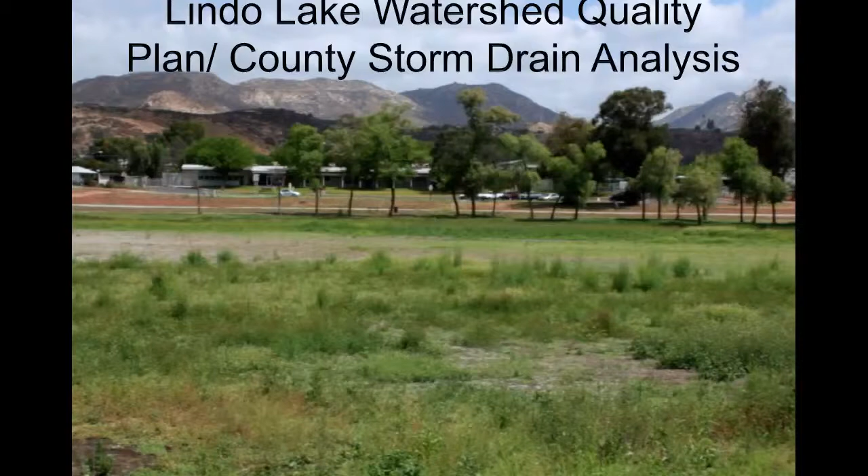The ENKI engineering team was tasked with creating a watershed quality plan and storm drain analysis tool for the County of San Diego. The location for the watershed quality plan is the Lindo Lake watershed, located in the eastern portion of San Diego County. Lindo Lake is burdened with poor runoff management from the surrounding neighborhoods that reside at higher elevations.

While the western section of the lake is fed with fresh water via pumps, the eastern section is provided water only from stormwater runoff and rainfall. Because of the nature of the water replenishment in this eastern section, and because it is the low point in the watershed, it has found itself a natural sediment basin for the area, accumulating years of soil and pollution.

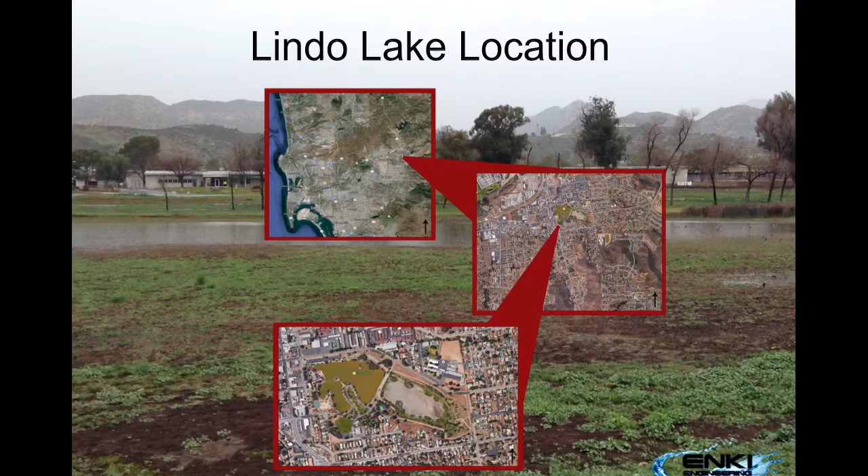The watershed quality plan tasked to ENKI Engineering will consist of a watershed management plan, which will include, but is not limited to, analyzing existing stormwater systems that feed the eastern section of Lindo Lake, providing recommendations to improve these existing systems, creating programs that assist residents who live within the watershed boundaries to reduce runoff from properties, and recommending future systems to treat the stormwater en route to the lake.

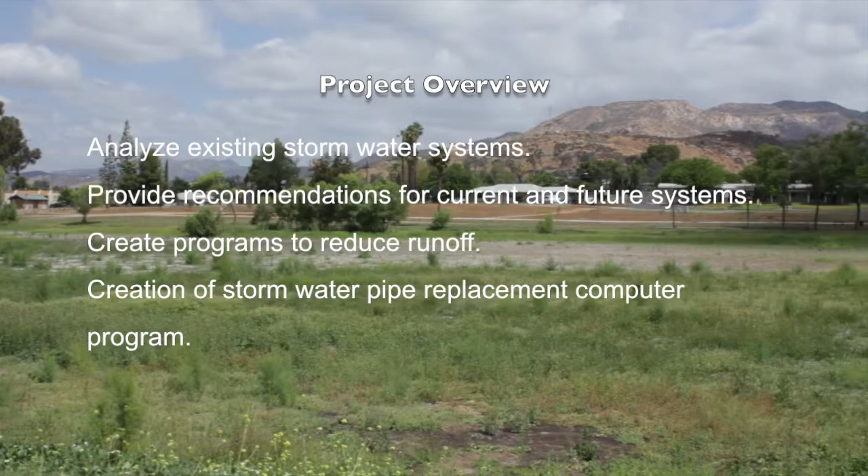ENKI also created a cutting-edge computer program to assist the county in future planning of stormwater pipe replacement. This program is designed to allow the county to stretch their budgets concerning necessary pipe repairs or replacements further than they are currently able. To show the feasibility of this program, ENKI will utilize it in a portion of the watershed management plan.

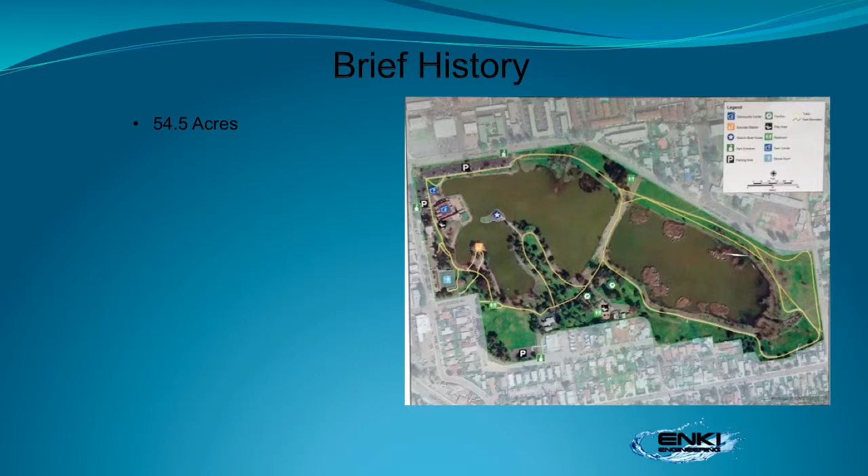Lindo Lake Park is a 54.5-acre public space with the eponymous lake at its center. The county acquired the park in 1920. Soon after, a dike was constructed through the lake, dividing it into two reservoirs. Due to percolation, evaporation, and the diversion of incoming water sources, both reservoirs could not be maintained.

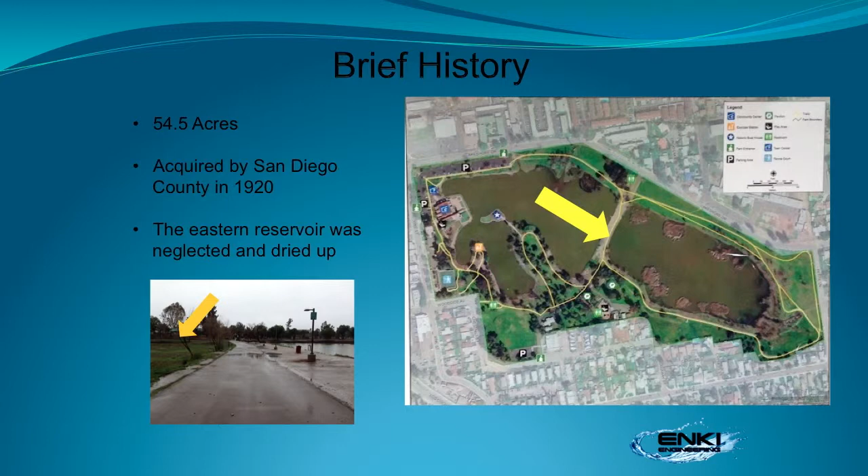Today, the western reservoir is periodically filled with purchased water. The eastern reservoir has dried up, only receiving waters from a stormwater outfall on the southeastern side that is amplified by heavy rainfall events.

The pollutants of concern at Lindo Lake include nutrients, sediments, organics, and metals. Water quality testing was performed for several of these contaminants. We collected water samples from both sides of the lake using a strict set of quality control guidelines.

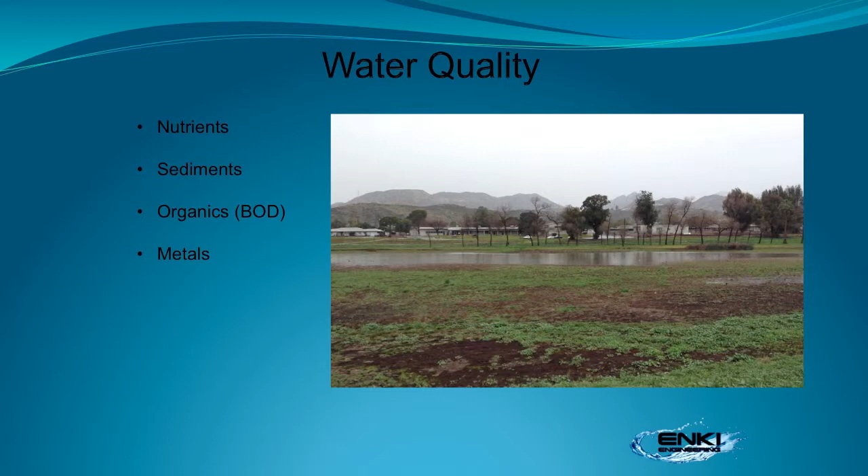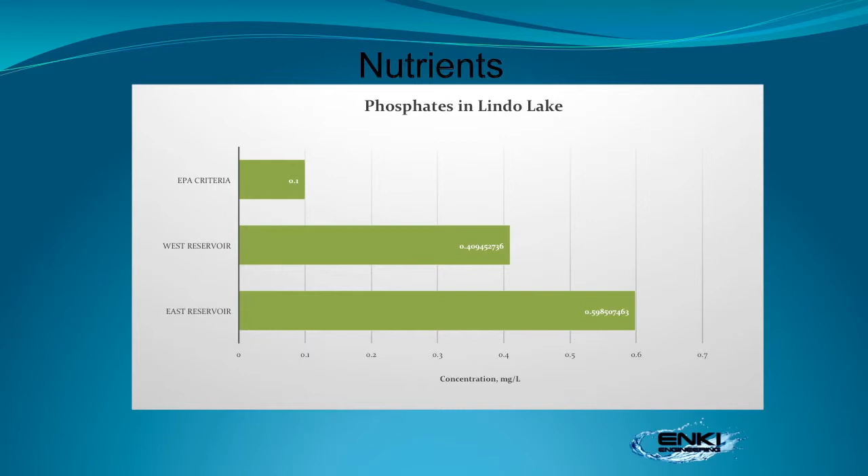We found that nitrates in both samples were well within the EPA criteria of 1 milligram per liter. The phosphates, on the other hand, were very high in both samples. These conditions could lead to eutrophication, which creates hypoxic waters that cannot sustain life.

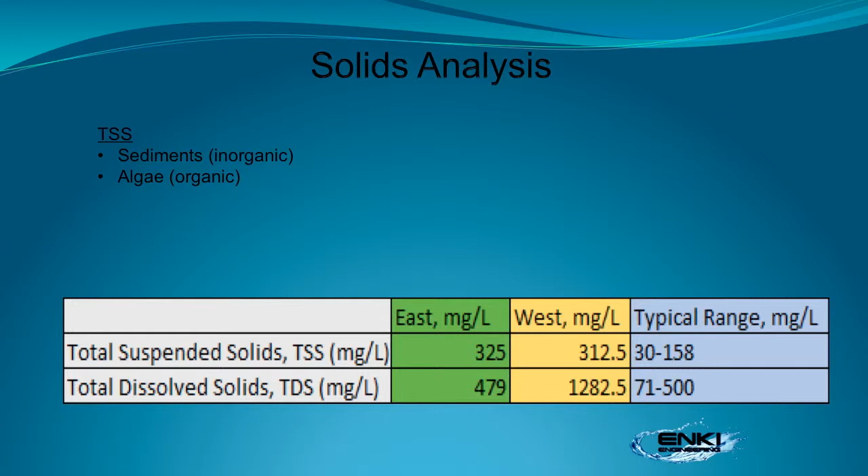The high suspended solids content mostly consists of sediment and algae from excess nutrients. It is worth noting that the western reservoir has more dissolved solids, which mostly consists of metal ions in surface waters. When this water percolates or evaporates, it leaves behind these contaminants.

Many plants and animals live in the soil. No endangered species reside in the park, but many are still in danger due to contaminants from the surrounding watershed.

ENKI Engineering is proposing to improve the water quality of stormwater runoff in Lindo Lake. As sediments continue to be sent into the lake from streams and bank erosion, the lake has become shallower. The geotechnical report will discuss the soil and sediment in Lindo Lake.

The topmost layer is vegetation. The topsoil is described as mud, very loose, saturated, dark gray to black in color. There is little detectable organic odor, but another component of this mud may be waterfowl droppings. The thickness of this layer is between 1.5 and 3 feet.

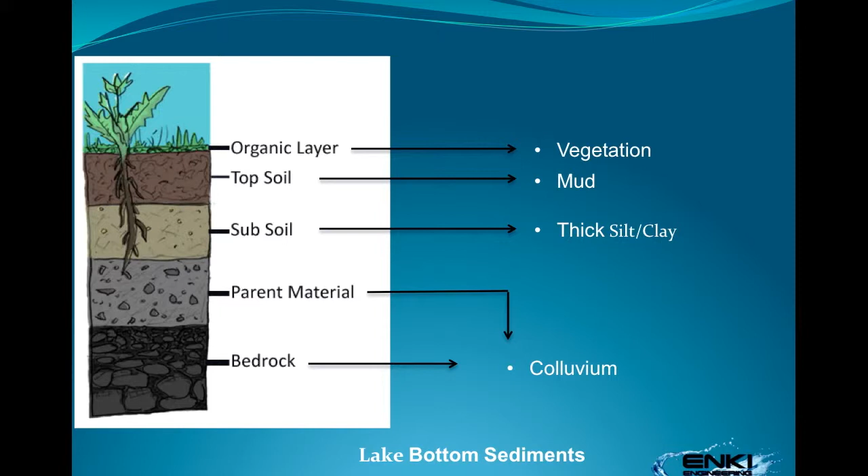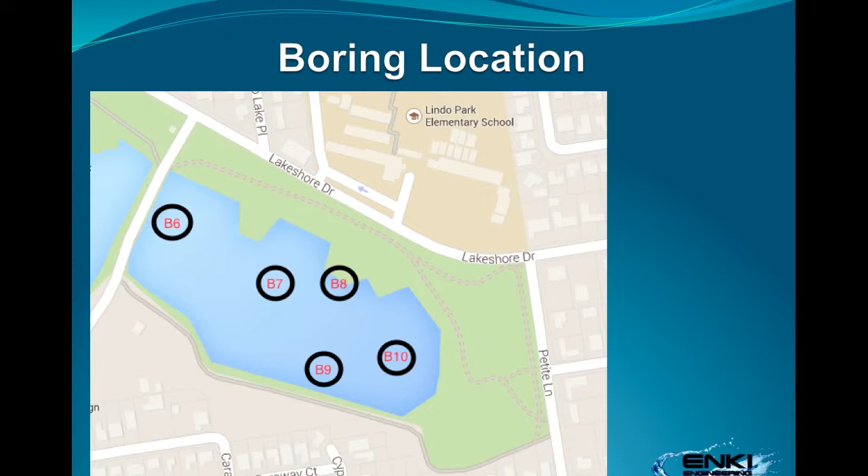The subsoil is thick silt or silt-clay sediments, of variable thickness and with some variability of texture. This layer can be generally characterized as soft, saturated, colored varying shades of gray. Underlying the lake sediments are colluvium soils from weathering of granitic materials and deposited by gravity into valley areas from surrounding hillsides. These are the boring locations where the soil was excavated from: B6, B7, B8, B9, and B10.

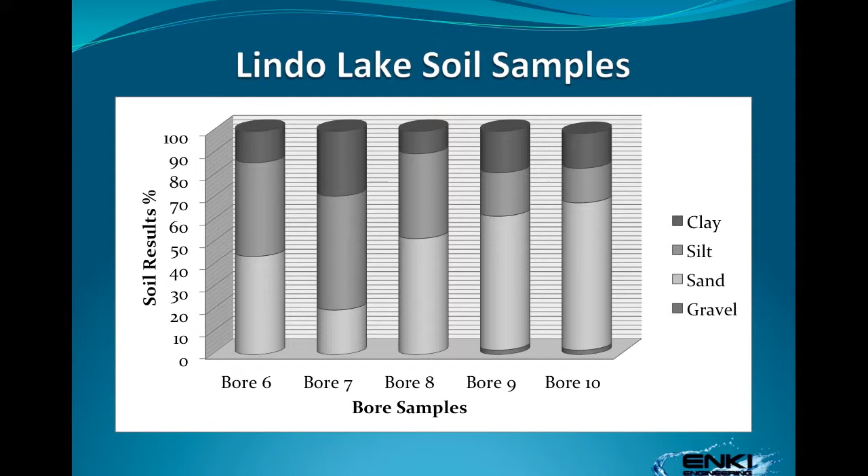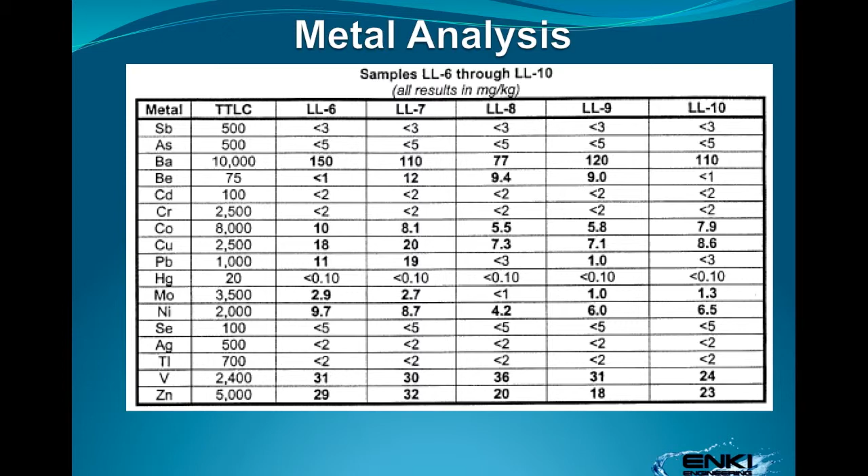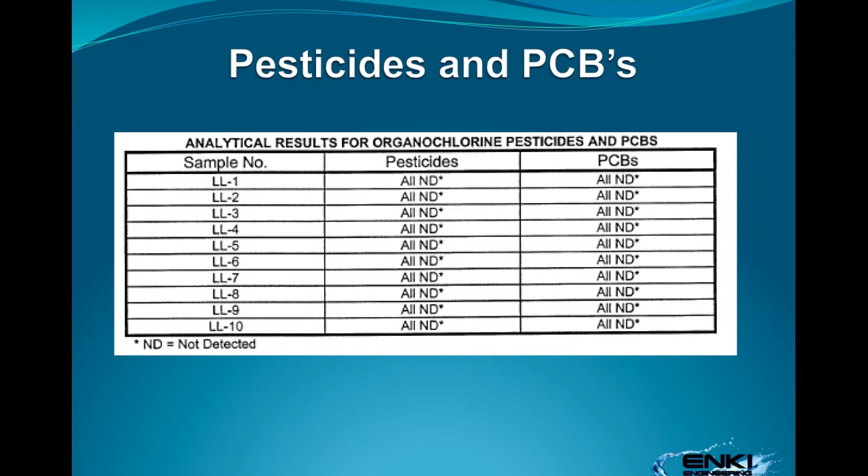The Lindo Lake soil samples are shown here in percentage of clay, silt, sand, and gravel for bore 6 through bore 10. The above table indicates that the metal analysis of bore 6 through 10 do not exceed the total threshold limit concentrations of the various metals. This table reveals that the soil in bore 6 through 10 have no detection of pesticides and PCBs. Based on the results, the sediment appears to be suitable for reuse after any construction.

In order to create a watershed management plan, we first needed to analyze the current conditions of the lake and its surrounding watershed. The conditions of the lake were photographed, and it was evident that a plan need be created that improves the water quality of the lake.

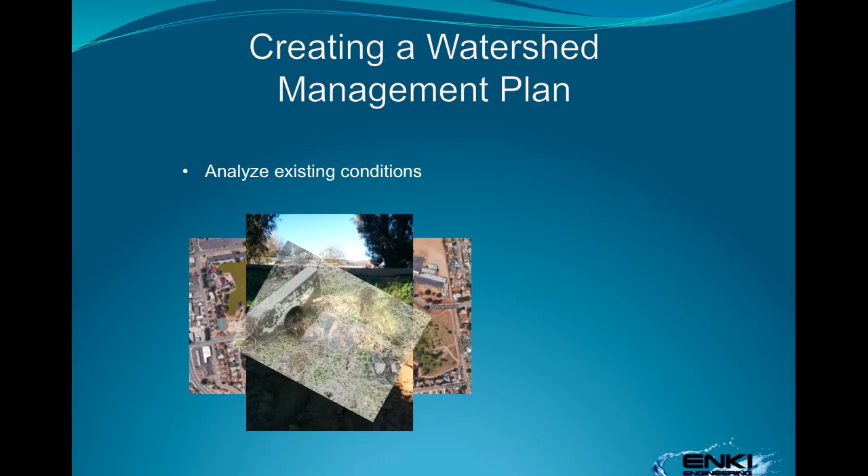Sediment was determined to be the prime pollutant of concern, therefore a sediment yield analysis needed to be completed. A sediment yield analysis report was performed by Parsons Brinckerhoff in 2014 and was used as the basis for ENKI Engineering's sediment yield analysis. The Revised Universal Soil Loss Equation, or RUSLE equation, was utilized as the basis for the annual sediment accumulation within our watershed.

The overall sediment totals were converted into kilograms and eventually into milligrams per liter in order to model it in specific software to retrieve sediment reduction.

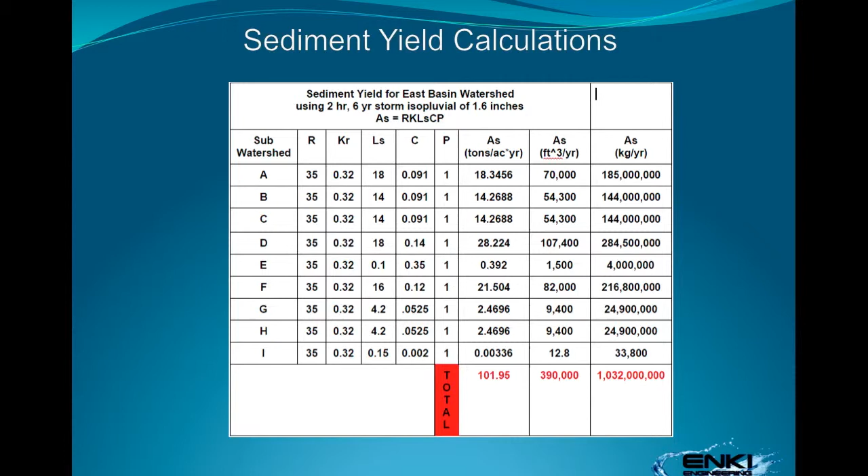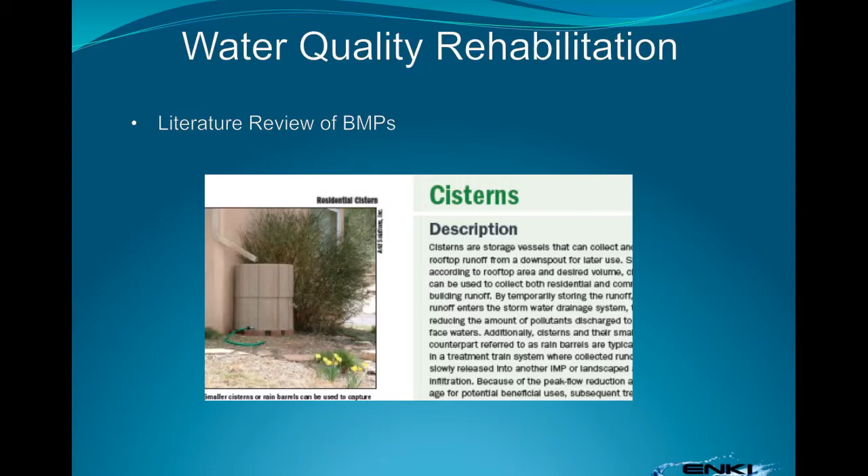In order to improve water quality of Lindo Lake's East Basin, best management practices, or BMPs, will need to be utilized throughout the watershed. But first, a literature review of specific BMPs was needed in order to understand which types would reduce the sediment that accumulates into the lake most efficiently.

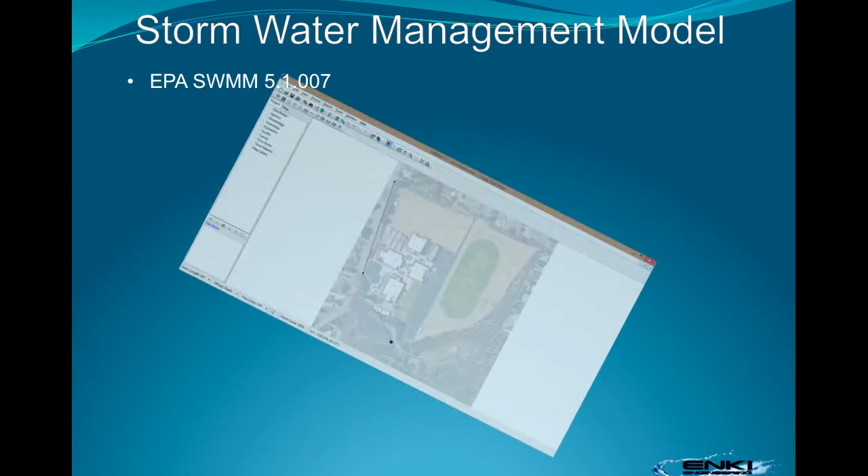In order to model stormwater runoff and subsequent sediment accumulation, the Environmental Protection Agency's stormwater management model, SWMM, was used. The SWMM model includes many parameters, including a subcatchment area with specific hydrologic parameters, hydrologic controls like inlets, conduits, and outlets, as well as initial pollutant levels and LID controls, or BMPs. These will mitigate the pollutant levels, in our case, sediment.

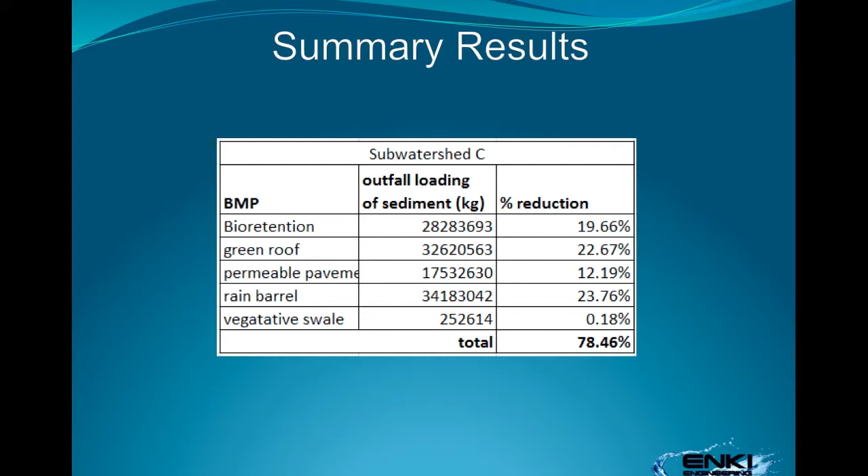The results of our SWMM model show that using the 5 LID controls shown, a maximum of 78.46% reduction of sediment can be achieved in the Lindo Lake's East Basin watershed.

Welcome to SD-RAIN. SD-RAIN is a tool specifically created to meet the needs of San Diego County. It was created to assist the county in their storm drain rehabilitation program, by studying storm drain pipe materials, and it functions as a design aid through storm drain analysis.

It works by asking questions that, when answered, will eliminate options and warn the user of applicable requirements to note from the San Diego County Hydraulic Design Manual.

Now, a sample run of the SD-RAIN program will be conducted. The user will answer the input column, and in doing so, the program will classify the pipe material as either OK, No, or see manufacturer, SM.

See manufacturer is returned when a pipe material is not completely eliminated and different manufactured pipes may be able to be used. Warnings referencing the San Diego County Hydraulic Design Manual will also appear when necessary. The final output is a list of the pipes that will not work, will work, or needs more research.

There is also estimated pipe diameter, estimated price, and estimated life expectancy.

SD-RAIN was created specifically for the user in mind. The program is soft-coded in that the reference pipe properties can be easily changed if chosen manufacturers offer pipes with different capabilities, prices, and properties.

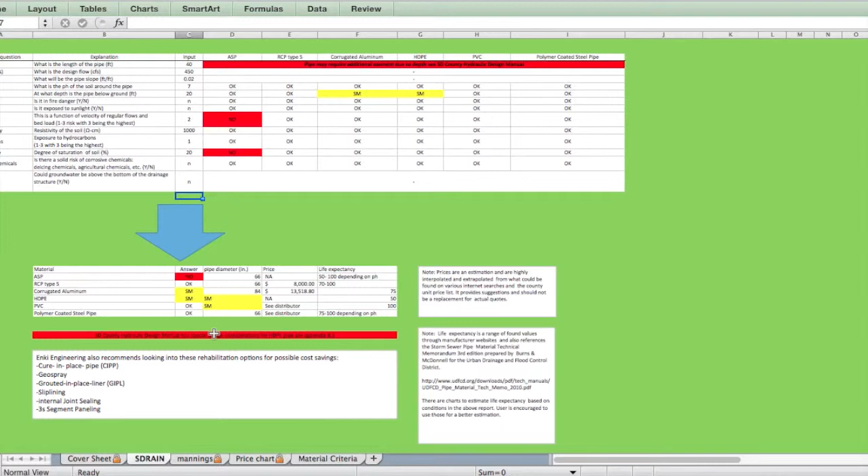Enki Engineering recommends the user familiarize themselves with the user manual and the methodology report before using the program. Enki Engineering and San Diego State University assume no liability for failed design or misinformed decisions through the use of this tool. The information in this tool is correct to the best of our knowledge. Remember, this is a tool and not a replacement for functioning knowledge of the subject matter.

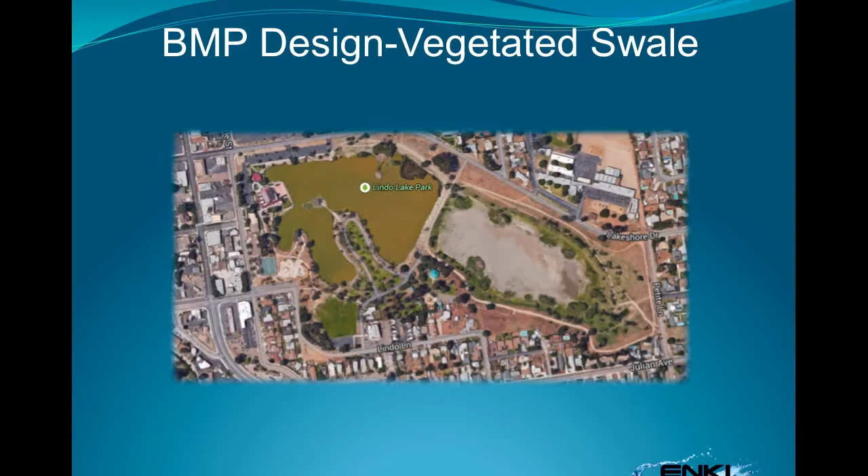The BMP chosen for the prevention of sediment accumulation and ultimate rehabilitation of Lindo Lake is the creation of a vegetated swale on the northeast side of the lake. The vegetated swale design will start on the north side of Lakeshore Drive with the 50-foot pipe that crosses underneath and connects into the lake.

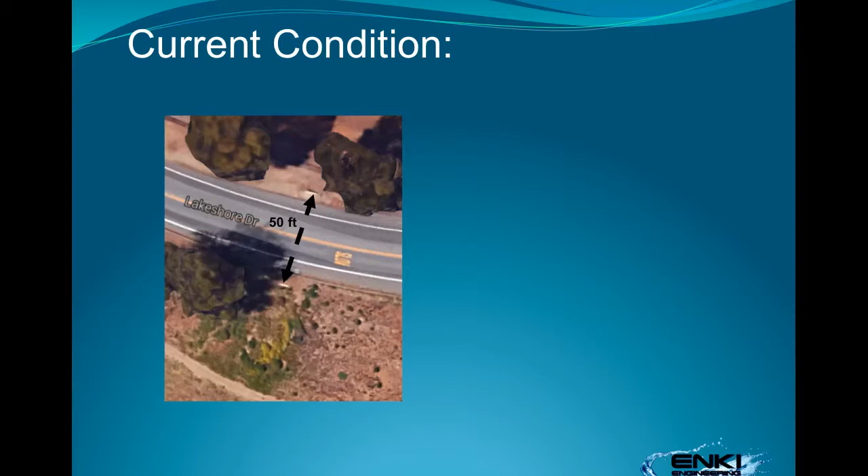The current conditions for both the entrance and exit of the pipe present a lot of sediment, vegetation, and trash accumulated, preventing the smooth flow of water into the lake.

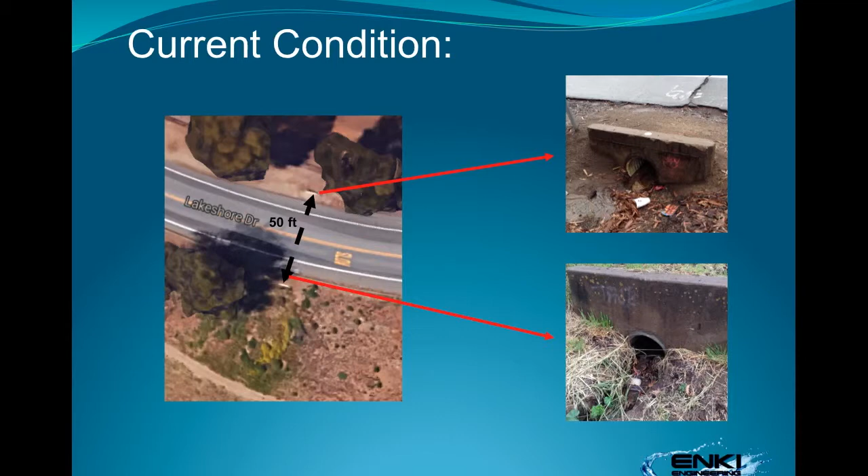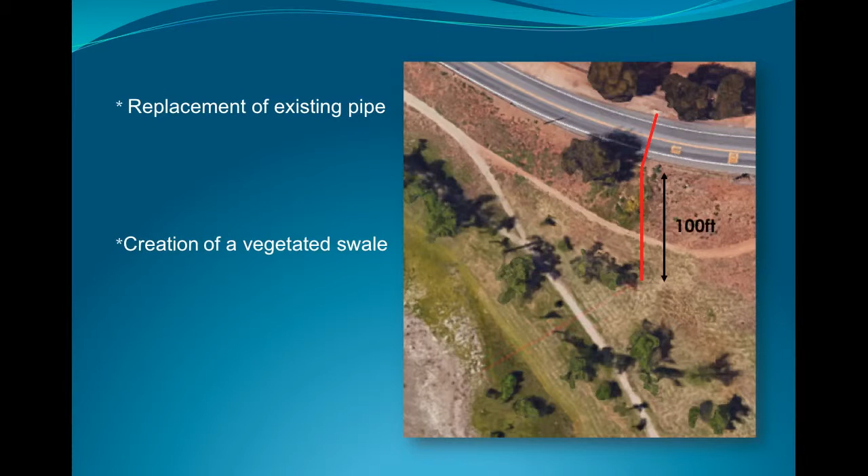Our design consists of the replacement of the existing pipe using the SD-RAIN program created by Enki Engineering, the placement of the 100-foot vegetated swale, and the addition of 2 bridges where the vegetated swale and the paths intersect.

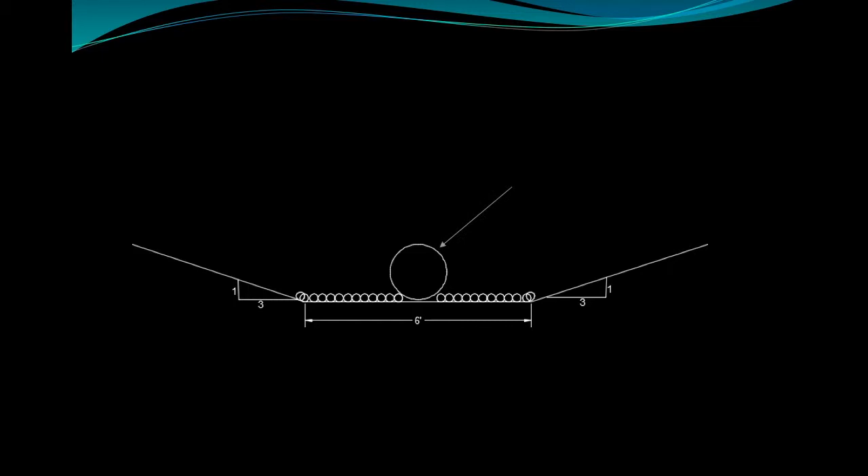The maximum flow calculated for this location is 12 cubic feet per second, which will require an 18-inch pipe. Based on standards, the width of the swale should be 4 times the pipe size, with 8-inch energy dissipators and a side-slope ratio of 3:1.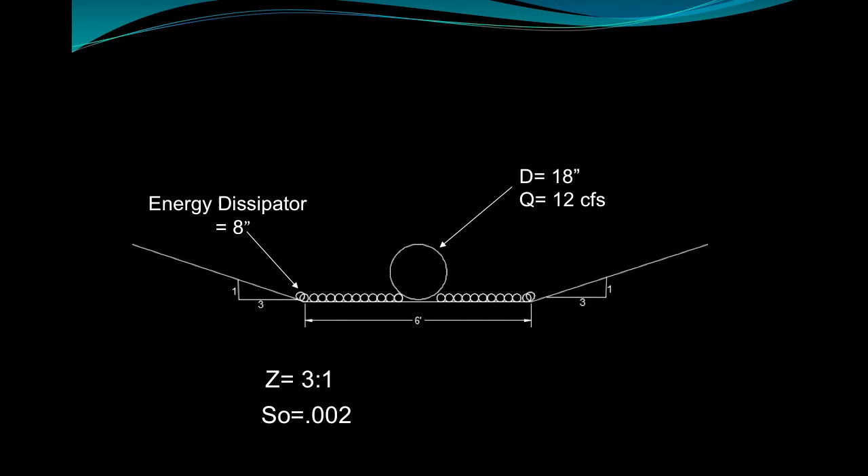With the design of the vegetated swale, Enki decided that this location would also serve as an ideal spot for the replacement of the existing stormwater pipe because the construction can happen simultaneously. This also presented an opportunity to utilize the new stormwater pipe program.

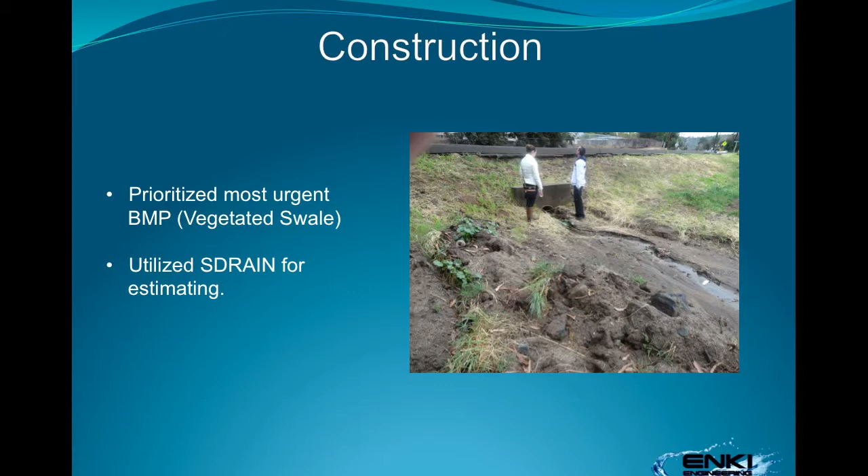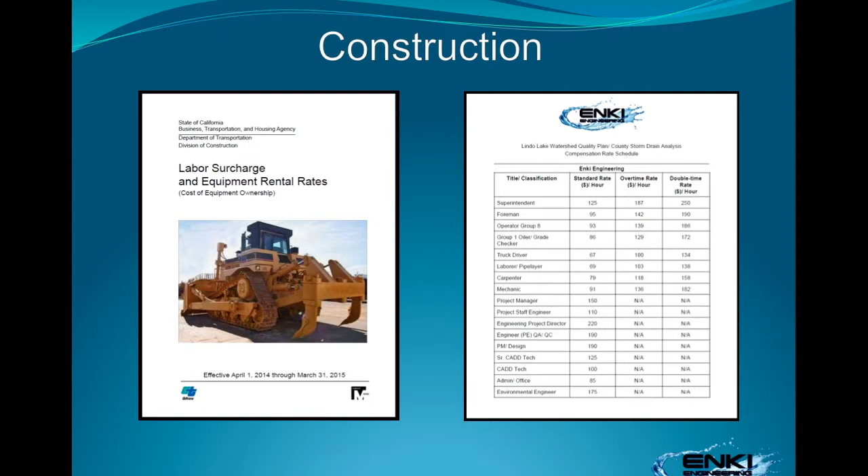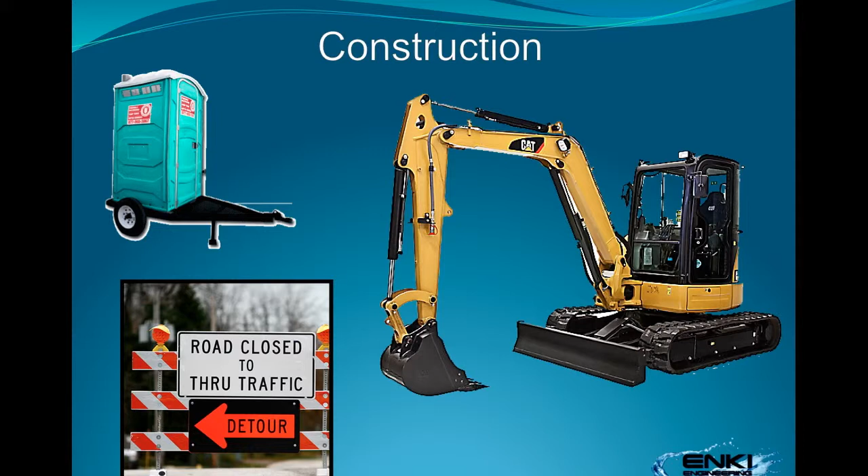In estimating construction costs, we utilized 2014 Caltrans equipment rates and adhered to prevailing wage rates for our labor. Enki will ensure that all equipment is on site and ready to go on day one of construction, to ensure an expedited process, saving both Enki and the county money. A traffic control plan will also be implemented to ensure safety for residents during the pipe replacement process.

The final estimated construction cost for the combined stormwater pipe replacement and vegetated swale stands at $46,573.69. All subcontractors and material will be locally provided.

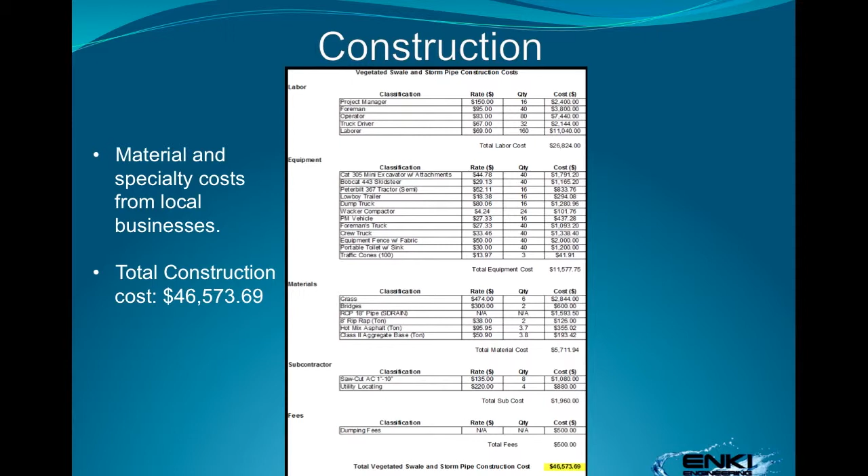Enki's SDRAIN program, for the first time, provided a real-world estimate of the cost of the RCP pipe that will be installed, and thus was used in the final estimate. One final note: a cost-saving measure comes from the soil, which once dry, becomes suitable for sale or reuse and does not need to be disposed of in a landfill.